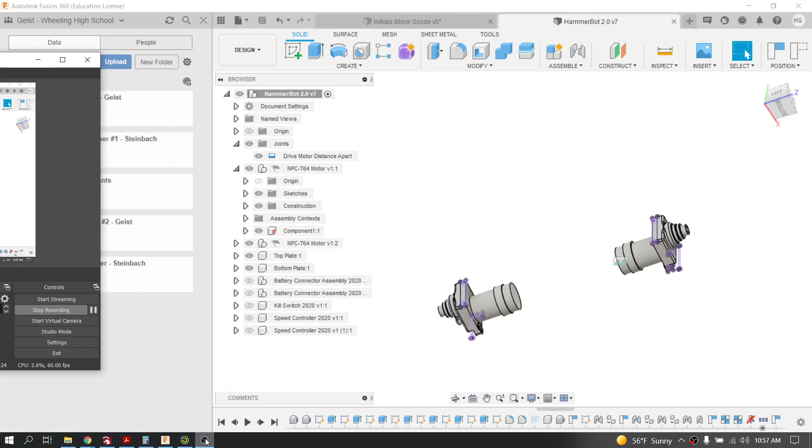So I'm going to use the HammerBot template to get started. So if you open your folder, you should find a template in which there are probably two motors sitting in there, spread apart and constrained or jointed together. So I'm going to start with that. Now, if you left click and try to drag them, they will not move. I kind of randomly placed them apart.

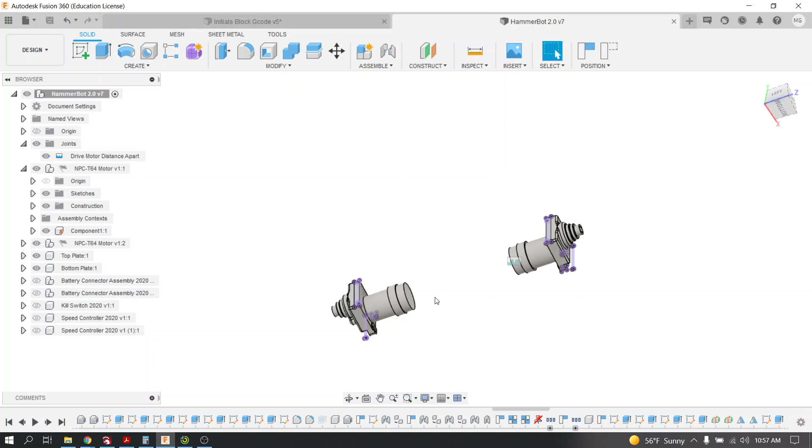You're going to have to make some changes to that based on how much stuff you're going to put in between them. So if you want to just temporarily turn on the eyeballs next to all of the things that are going to have to eventually fit into the robot. It's really not much if you don't have a weapon. You've got two speed controllers, two batteries, and a switch, a kill switch, and this turns it on and off.

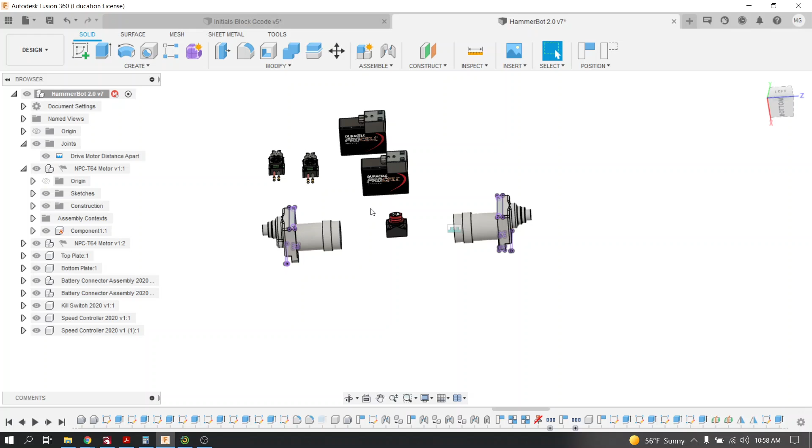There's other things, wires, a lot of wires actually, and a little tiny receiver, but I didn't put that in yet. And you're also going to want to make sure that your hands can fit in here to move things around, to plug in the little connectors that fit into here and things, and we'll get to that later. But remember that this stuff is going to have to fit in. So we're going to turn them off by clicking the eyeball for now.

So I want to show you how to do some designing where we don't have to use as many dimensions as you normally would in an IED class when you're starting from scratch. So I want to show you where the joints are. So if you're opening it for the first time, it might look like this, where the whole tree system in the browser is closed or collapsed. But if you expand the joints, I named this joint Drive Motor Distance Apart.

And if you right click and you edit that joint, you're going to notice that there's an offset distance in the Z of 15 inches. I can change that to whatever I want, 20 inches or 5 inches, or basically that's going to say how far apart those motors are, and I can make that change at any point in the design if there's not enough or too much room.

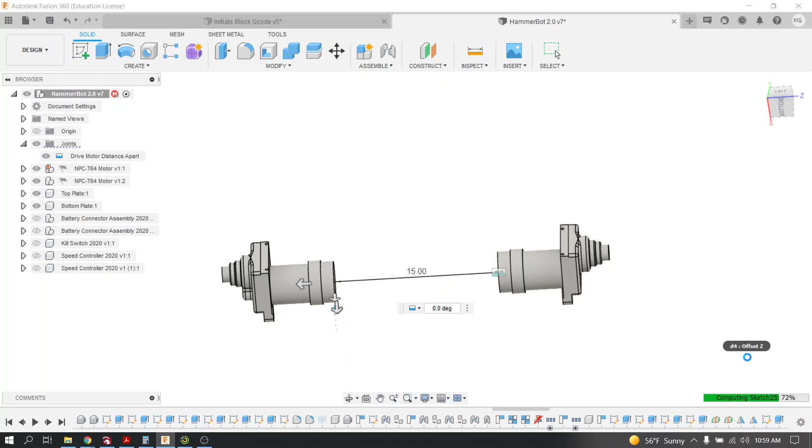I'm going to start with 15 inches and kind of begin my design and see what that leaves me when I start to put my batteries and all my components inside my design. So once that updates my graphics, I am going to begin. So I have two components already created for you, a top plate and a bottom plate. And there's only one thing in each of these. So I'm going to go ahead and activate my top plate. Notice how these ghost away.

And when I do that, I want you to notice if you expand the tree below it, there's a sketch down here in the history that I've already started. I would recommend that you begin on this sketch, and I'm going to tell you why. If I double click down here in my history, if you open up the sketches folder, you'll also see that that sketch exists.

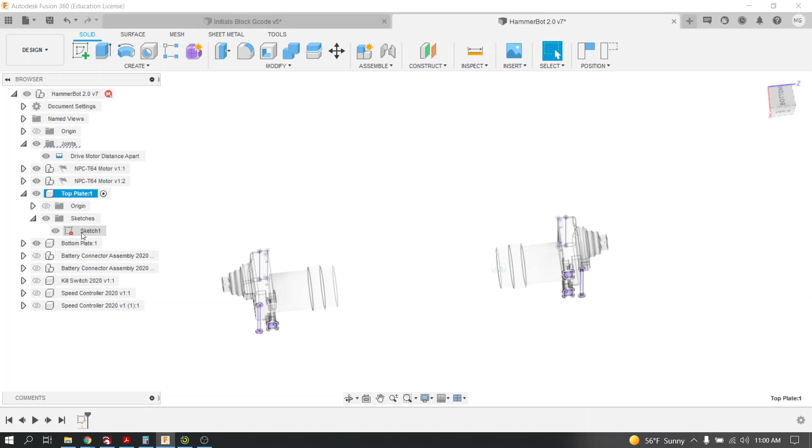So if I start on that sketch, what I've done is I've projected the geometry of the motor onto the sketch, which is like creating a shadow of the hole in which we're going to be bolting the top plate to the motor. And I've also projected the edge of the motor, the shadow of the edge of the motor, onto the sketch.

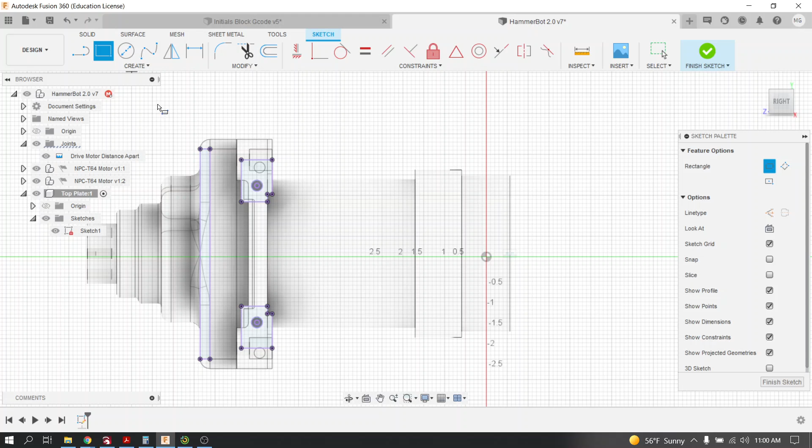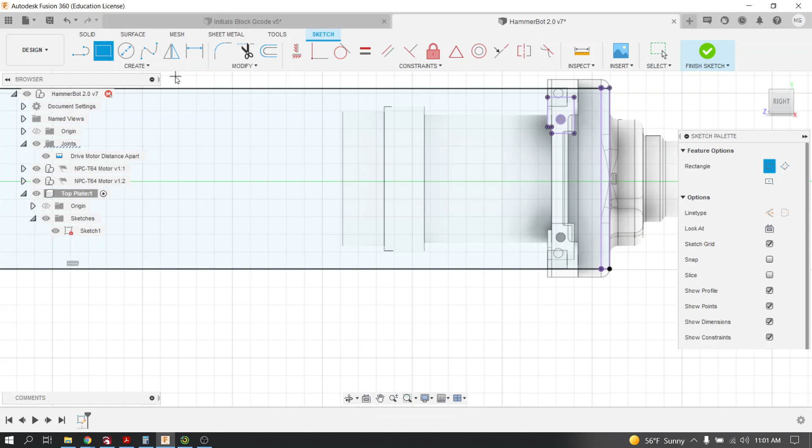So what I'm going to do is I'm going to draw a rectangle, and I'm going to snap, making sure that the little box symbol comes up when I click. And then I'm going to roll my mouse out and pan over to the right hand corner, and I'm going to snap to the furthest edge here because in my mind I'd like to design this plate to go the full distance all the way until the edge of the motor, and then I want to make sure that these holes come up as well. So right there.

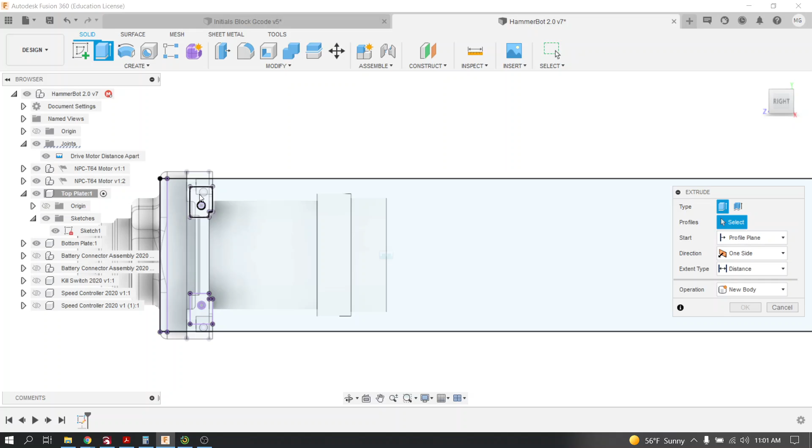Okay, so the reason why I'm doing this is because when I finish this sketch, giving my computer a second to catch up, and I extrude, always capture position anytime that window comes up, I can extrude this sketch and I can include the holes that I projected from the motors. Now notice how all of my lines are black, meaning that they're fully constrained.

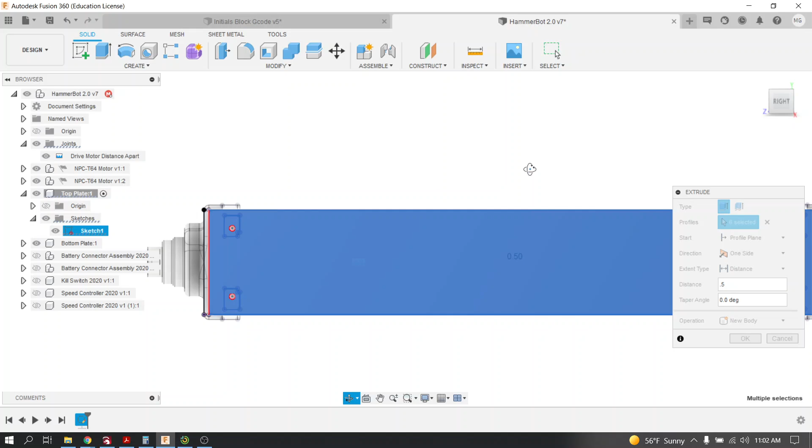Pick all these regions and extrude this to a distance of 0.5. That's because I'm going to make this out of polycarbonate, and if you measure how thick the polycarbonate material is in the shop, it's 0.500. Now I'm going to hit OK.

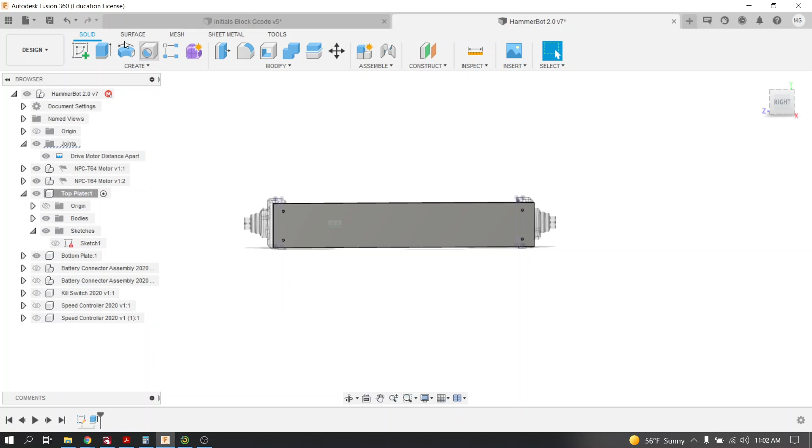Assuming for this hammer bot that I only want this plate to be this wide, I think that's okay. If I wanted this to be like a wedge bot, I could have made this rectangle longer, or created a sketch on this bottom and added an additional rectangle snapped onto this corner, so the top plate could be a little bit longer by adding an additional extrusion.

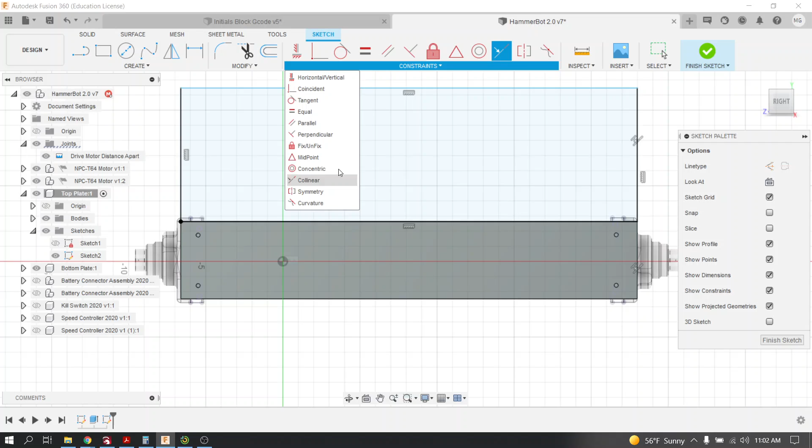Now I'm going to use collinear to line it up with this edge, just like that. The reason why I'm using constraints instead of dimensions is because I haven't dimensioned this yet - I don't know how far forward I want the robot. I'm going to activate my assembly now and show you why I did the snapping to the projected geometry and the collinear between these two edges.

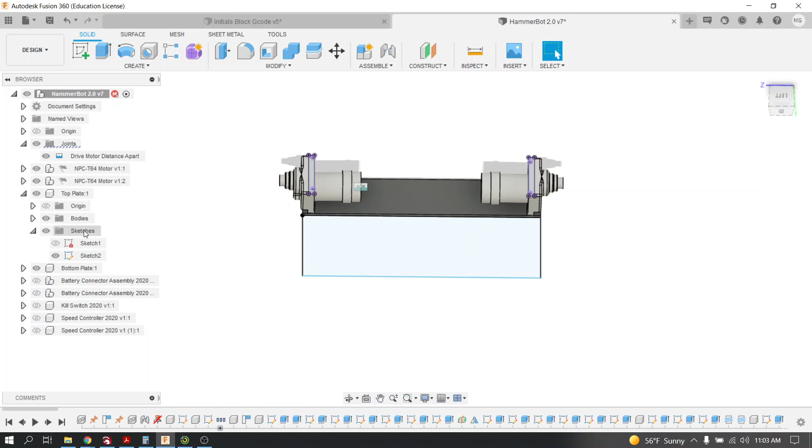Let's say that I decide I forgot to extrude this. Let me go back to my top plate and extrude that to half an inch, 0.5. Looks like I've got to go in the negative direction - make sure you're extruding it all in the same direction. There we go, okay, so now I have a bottom plate.

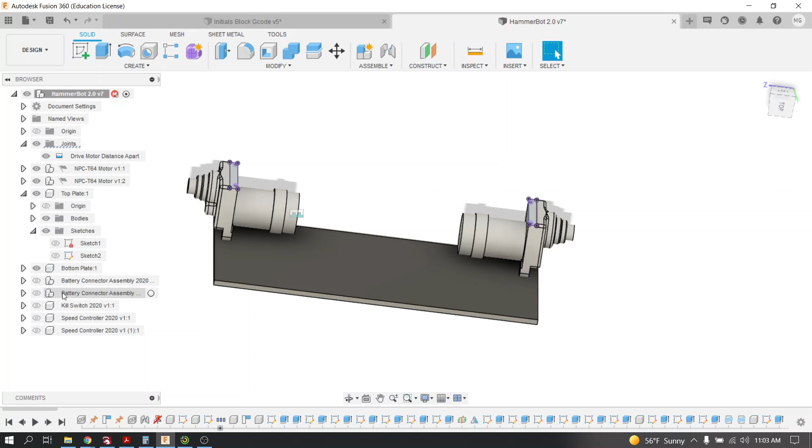I'm going to activate my assembly again. So let's say I turn on my batteries and I place them in there, and right now they're not constrained or anything. Let's say that I decide I want my motors to be closer together.

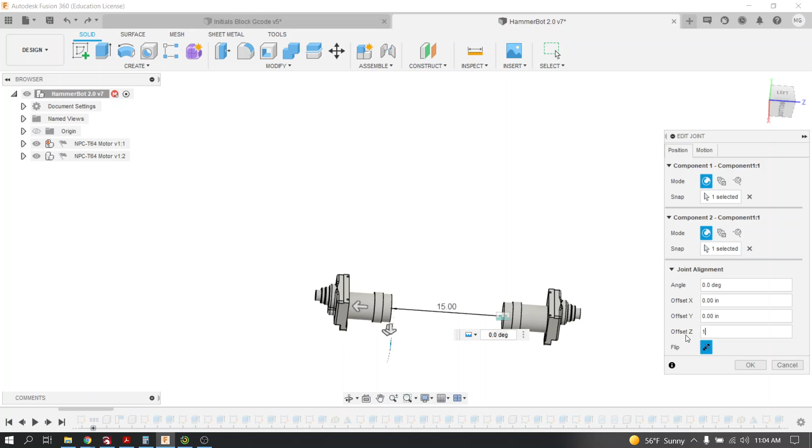If I go and edit this joint by right-click, edit, and change my offset distance to, let's say, 10, and I hit OK, watch what happens. Computing. Updating graphics, sorry my computer's slow. Everything moved with it - so this plate shrunk with the motors as the distance came together.

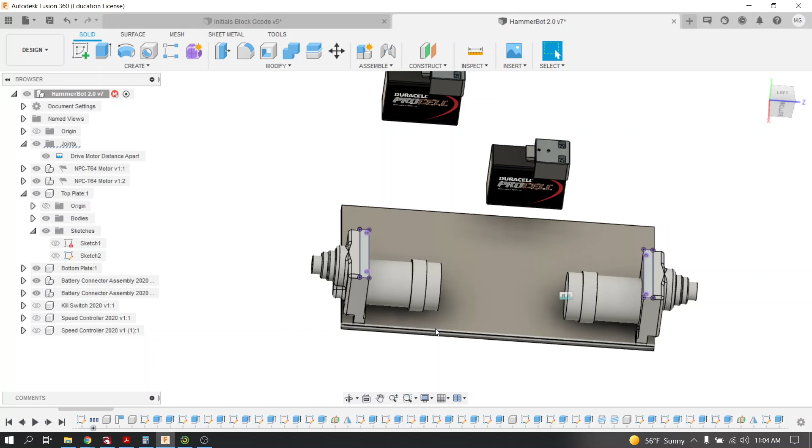So the projected geometry, which were just the shadows cast onto the sketch, it followed. That's really important, because if we make any changes to our design, meaning we move the motors closer or further apart, it's going to follow that geometry.

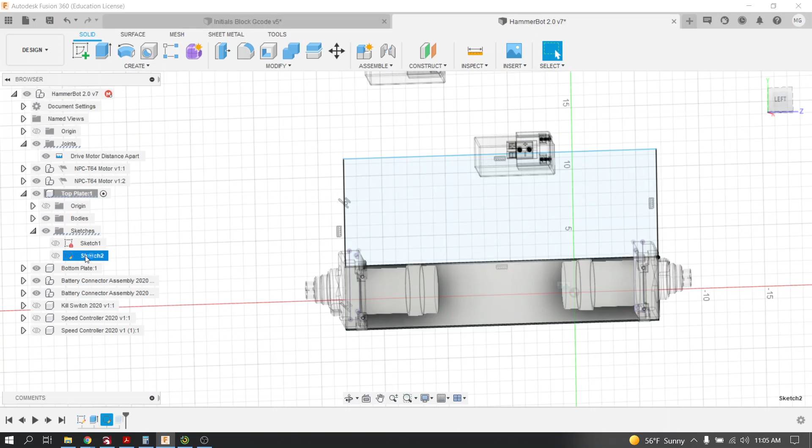Now I did not put any dimensions on how far forward this plate came, so that one is going to require dimensions. I'm going to go back to my top plate, open up sketch number 2, and you'll notice this line is still blue. So I better figure out how much further forward I want that robot to come - maybe for now I'll put in 10 inches, and I can always edit that later. But there's only one dimension in this bottom or top plate, you'll notice - everything else is driven by the projected geometry.

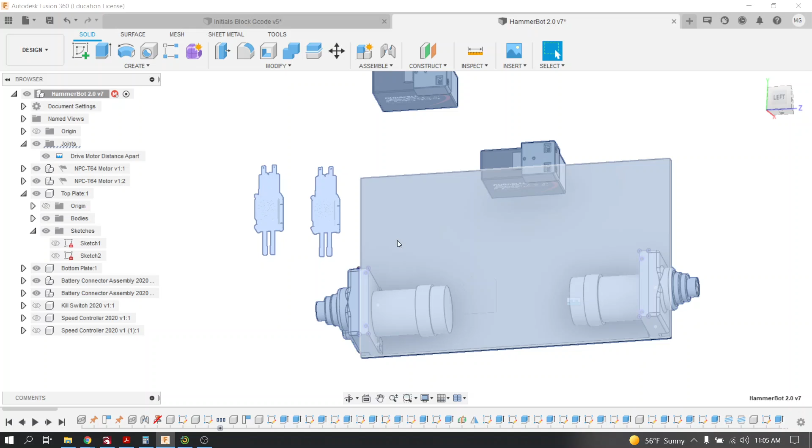Now, you'll notice when I go back to my assembly, if I activate it by clicking the radio button, and if I left click and hold, I move this plate - oops, don't do that, I'm going to undo.

That's because every time you create a component and go back to the assembly, we need to create a joint, meaning tell it: are you locked to something? Should you be rotating? Should you be sliding? So after you create a component or a body, it's very important that you immediately create a joint.

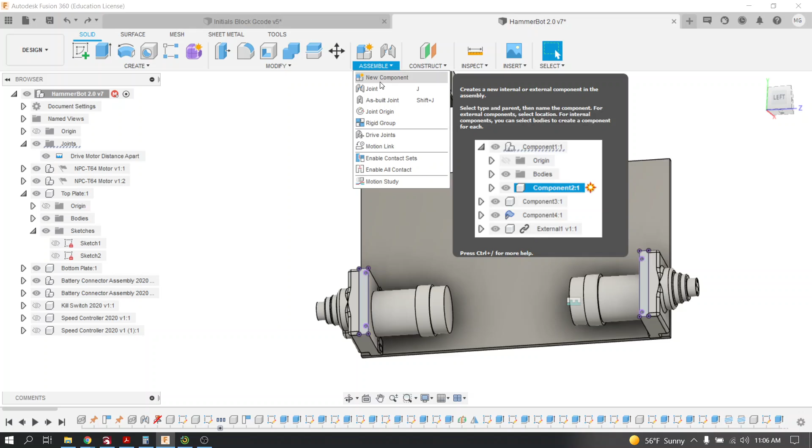So what we're going to do is right away go to Assemble, and we're going to do an as-built joint - meaning directly as I build it, I want to create a joint so that it stays in place and I can't move it. As built, I would like to do a rigid joint, because this plate isn't supposed to move in relationship to the motors, so rigid is perfectly fine.

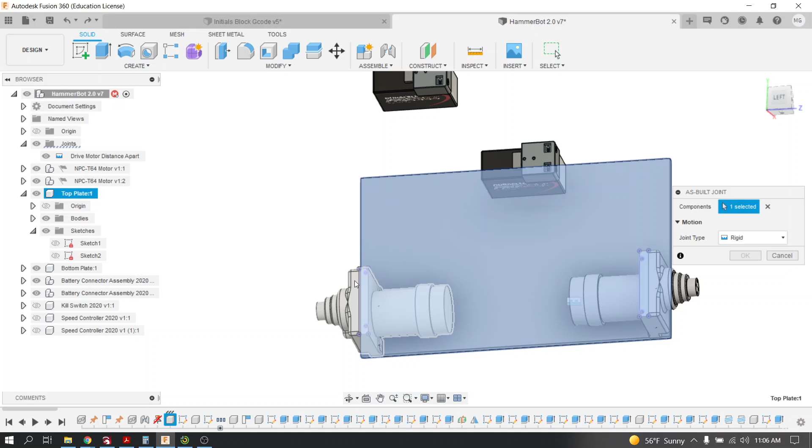I'm going to select the plate, and then pick a second component that I would like to keep it locked together with. So I'm going to pick the motor, and just say OK. It's a good idea - you'll notice in the joints folder that a new rigid joint appears.

Good idea, folks, that you name these. So a slow 2 clicks, name them: Top plate locked to motor - that's just for future reference. You're going to end up having a lot of these joints, and you don't want to get confused as to which one is which, just in case you have to modify it later.

All right, let's just make sure that once I've done that, if I change my motor distance, that plate's going to move with it. Let's go crazy - let's say 25 inches.

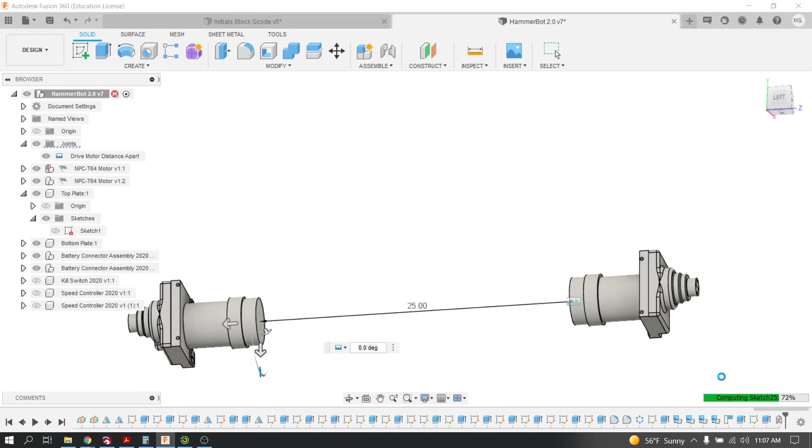It's going to have to compute my graphics because my computer is getting old, kind of like the designer here. We're going to update the graphics, and voila, I've got a huge robot.

I don't want it to be that big, so I'm going to click undo. You guys should know this undo button, it's right here, the arrow to the left.

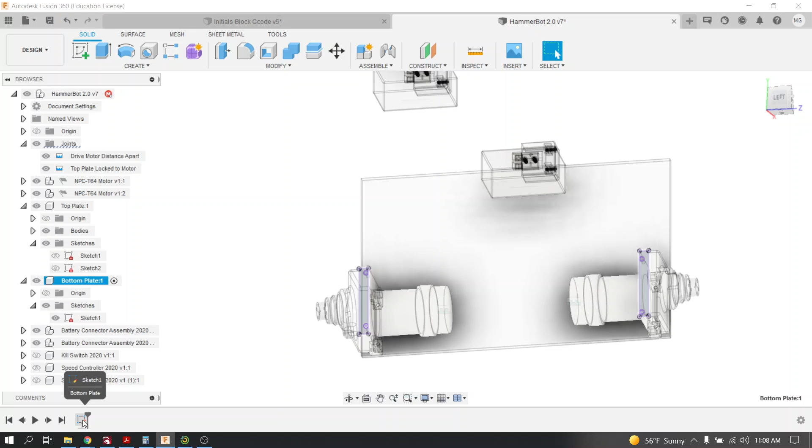Anytime you make a mistake, undo. Now I'm going to work on my bottom plate, and I'm going to basically do the same thing. Activate it, I already have a sketch started for you. Please use my sketch. If I open up the sketches folder, I can find it there, or I can just double click on the history and open it from there.

And I'm going to draw a rectangle and start in the top corner, the topmost corner, scroll out, in to the bottommost corner, right? Okay, and then I'm going to finish my sketch, let my computer catch up.

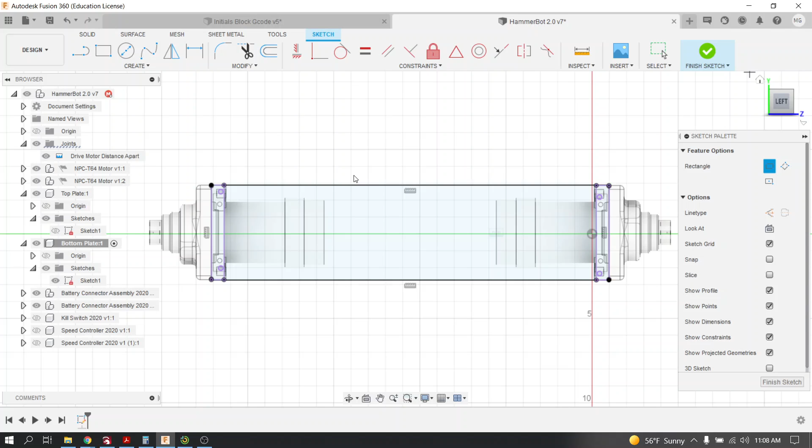And then I'm going to extrude it, making sure that the holes don't extrude, so that should be empty. If it accidentally you pick it, just cancel and try it again.

So 0.5. Should probably tilt my world a little bit, make sure I'm going in the right direction. Yep, I'm going up.

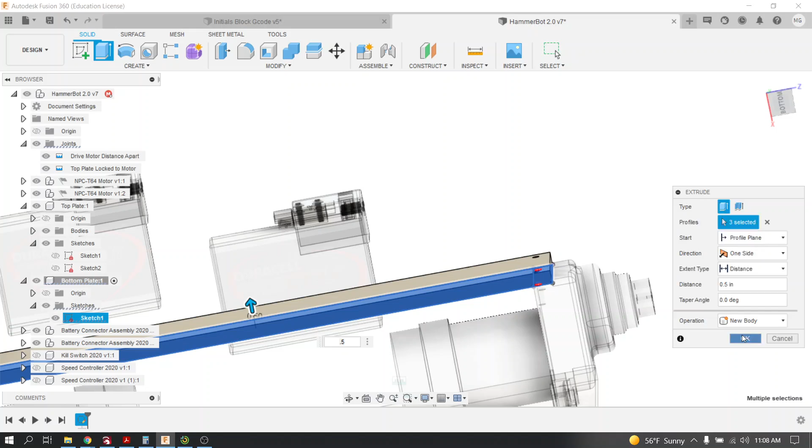You might, if you're smart and thinking that I should probably project these holes a little bit larger than the diameter of the hole that's behind it, you're absolutely correct for clearance, but we do have drills and we can always drill those out a little bit more once it comes off the machine.

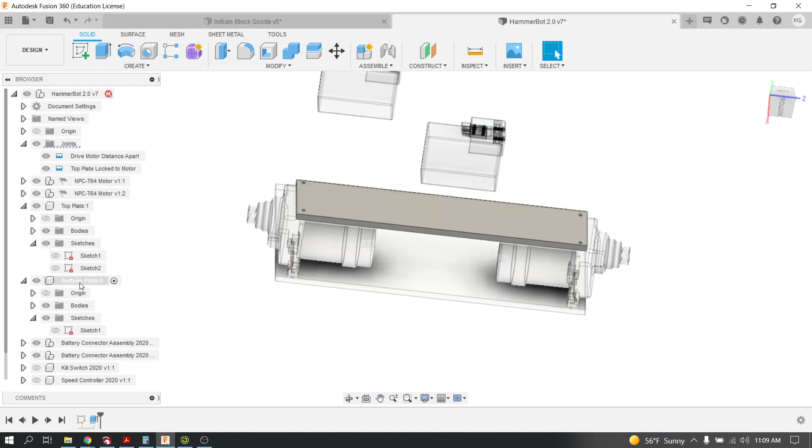That's fine, so I'm going to practice what I preach, and I'm going to go directly to the assembly, and I'm going to do an as-built joint so it doesn't move, because look, it moved. Undo. So I better immediately do an as-built joint.

This to the motor. Now it's locked, now it does not move. And I'm going to name it with a slow double click.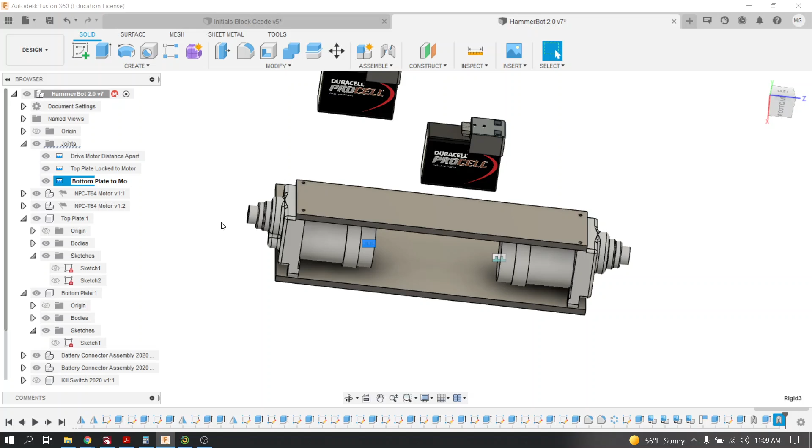Bottom. I can't spell. Bottom plate to motor. Here we go. Now these are solid pieces of polycarbonate, which will weigh the most.

So we're certainly going to want to maybe remove some material or lighten them up. At this point, I think it's time for us to look at the geometry of each of these components and think about what can we do to make them lighter. Can we take out some triangles or squares or rectangles to lighten them up?

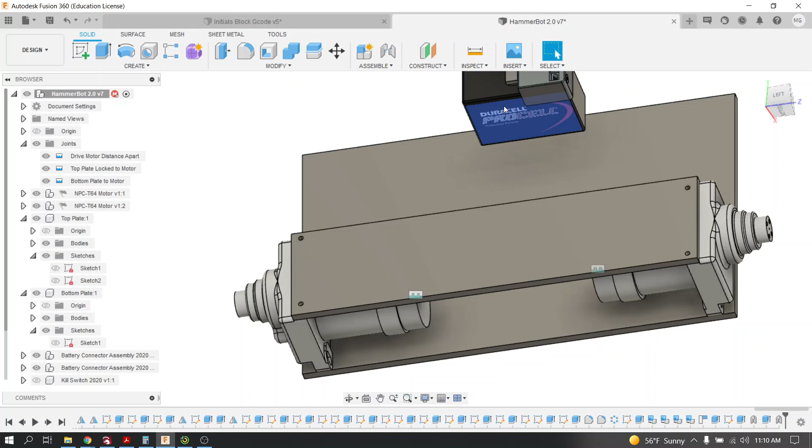If we're going to maybe put this battery—why won't you move, battery? Sometimes it's a little clicky. Left click, hold to drag parts around.

You might want to start thinking about placing these batteries into your assembly now and moving them around to make sure you have room. Where are they going to go? How are they going to sit? Are you going to have room to get your hands in there? Of course, maybe this plate comes forward a little bit more than what I have.

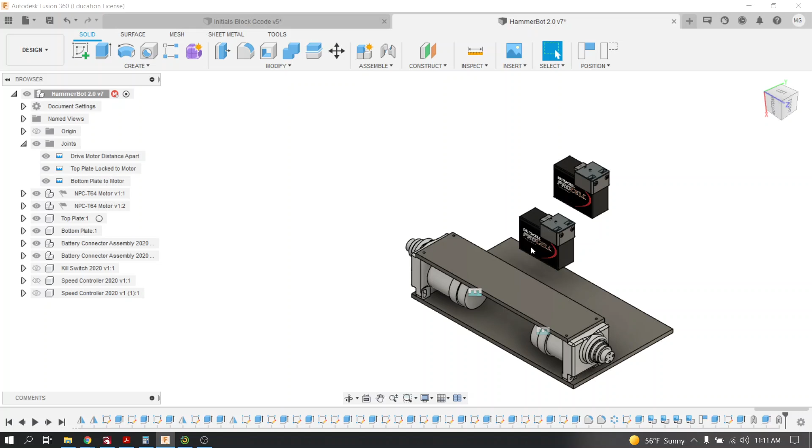If things are in your way and you can't see, you can temporarily turn things on and off by clicking this little eyeball. But if you'd like to place your batteries into the robot using a joint, I'm going to show you how to do that right now.

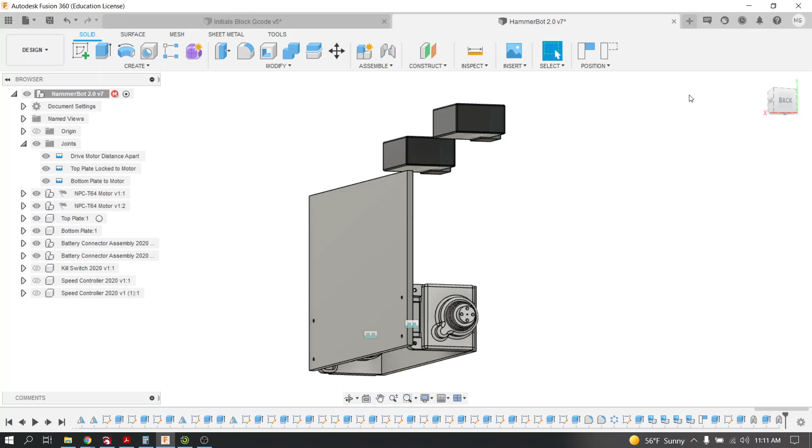If you're wondering how I'm easily orbiting, press the Shift key and hold your middle mouse rolling button at the same time, and you can easily orbit. So I'm going to spin it kind of upside down-ish, and I'm going to add these batteries locked to the robot.

So let's assume that I wanted these batteries to sit somewhere on the surface of this plate here. This is actually the top plate. I don't know why I'm building it upside down, but I guess top, bottom, it really doesn't matter. Maybe it does matter, but for this demonstration it doesn't.

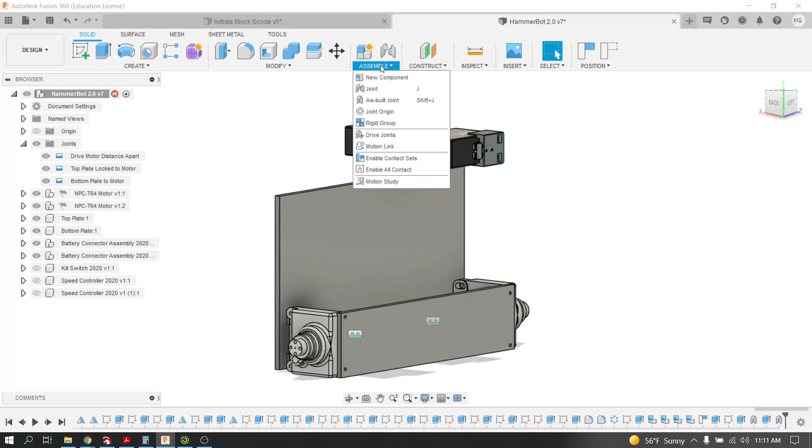So what I'm going to do is go to Assemble. And in this case, since I didn't build the batteries in place, I kind of brought them in, I'm going to do a regular joint. And in this case, I'm going to go to Motion and make sure that I'm on Rigid.

These are all different types of motion. Unless something is moving, you're always going to use Rigid. When things are in motion, that's when we get into these other ones here. But for the most part, if it's not moving, you're going to use Rigid.

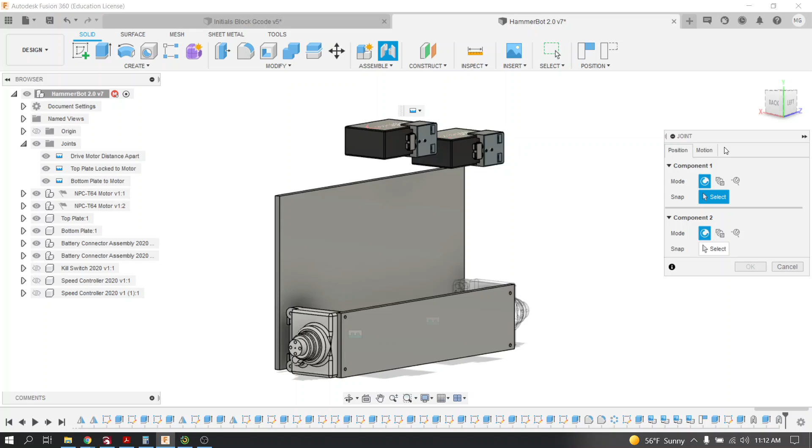After you select Rigid, go back to Position, and this is how you pick things to move them around, to get them to where you want them to go. So again, make sure it's on Rigid, and then for Position, you're going to spin around and pick two different objects from two different positions.

So I'm going to first pick the battery, and also as I'm picking it, before I click, I'm going to make sure that the pick point is, for this one, in the center.

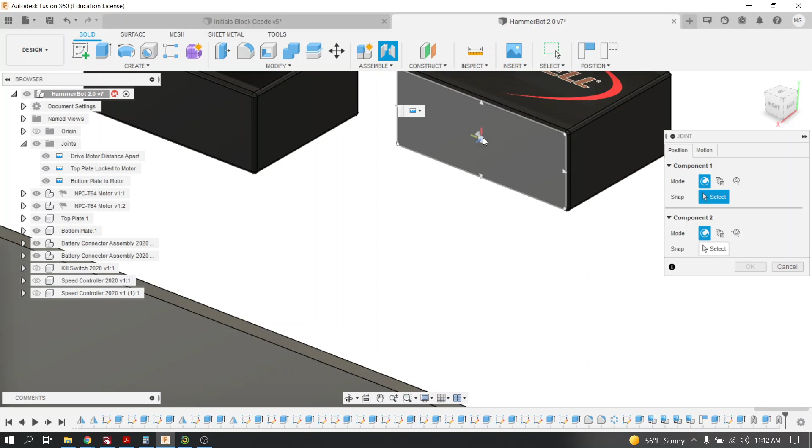So this surface, and then make sure the center point lights up before I click. By doing that, when I spin around and find the surface I'm going to be sticking it onto, you'll notice that surface lights up and the center point lines up. That means the battery is going to go to this surface, and those two points that lit up are going to touch.

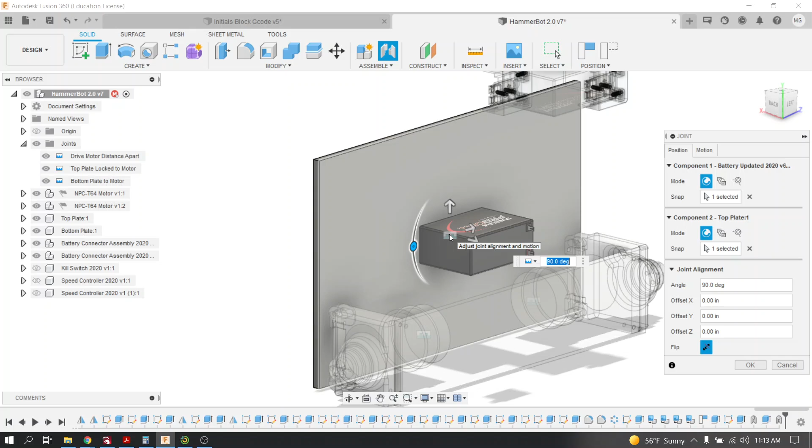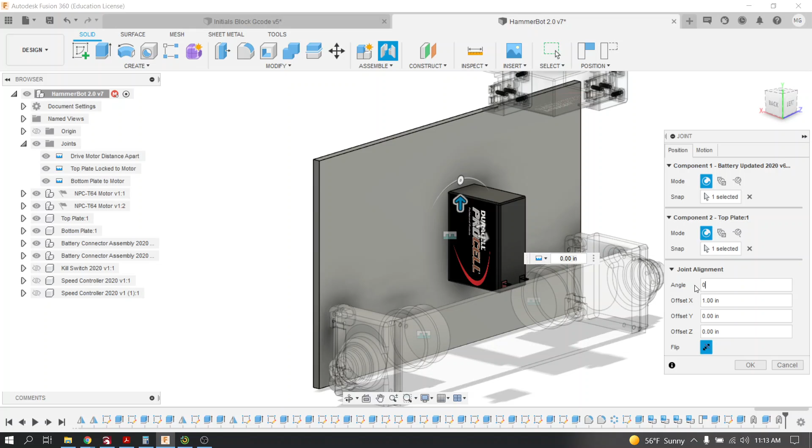Now, I don't want the battery to go there. From here, I can move it to position it by dragging the arrows, or if you wanted, type in distances. If I don't like the orientation, the angle, I could say I want it at 0 degrees if I want the battery going that way, or 90 degrees if I want it going that way. I don't know yet, so I'm just going to start maybe going that way. Again, I'm not sure what I want yet, I just kind of want to place them on the surface to start.

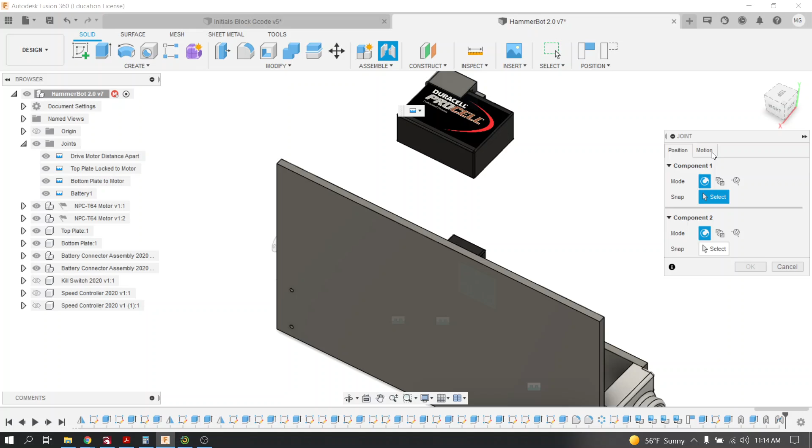I better name that battery 1 or something so I know what these joints are, so when I move them later I have an idea of what I'm moving. Do the next one: joint, rigid, center to center. I think I did 90 degrees, so I should do this one at 0. And I'm going to just move it over so it's not on top of this other one. This is going to be battery 2.

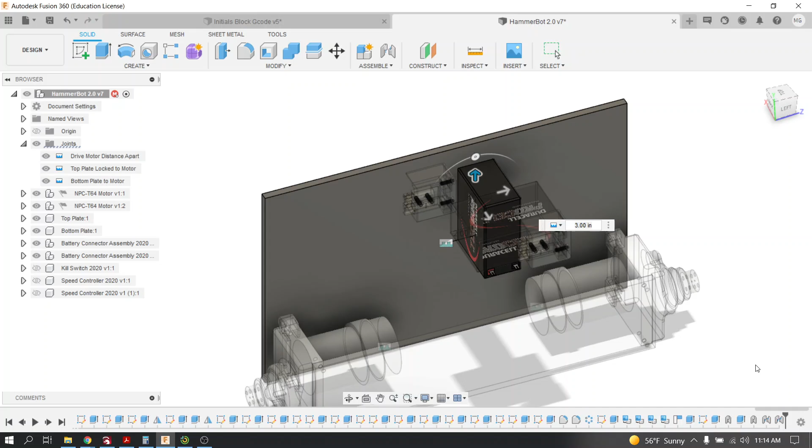So as we move through this design, let's say I don't like where they're at. All I got to do is right click, edit joint, and then I can just move it over. Or if I like it more forward, I can move it from there. Now I've just moved it by editing the joint.

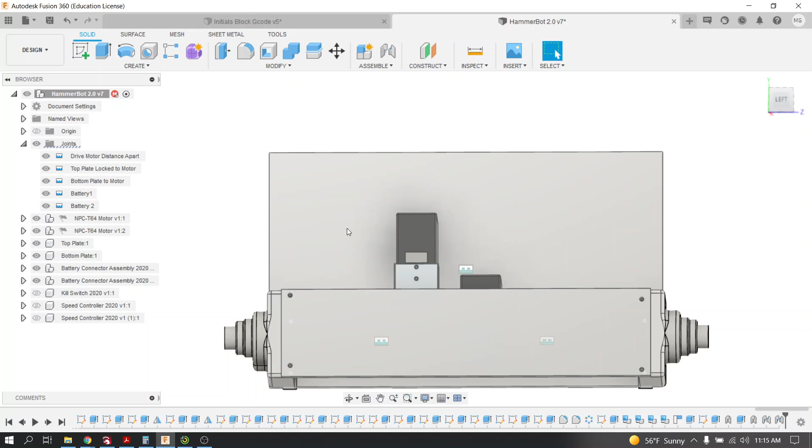But again, I think where I placed them might be a good starting point. Maybe we can tuck them a little bit forward, possibly. All right, so we'll move them back, and I'll take the other one and move it back as well. Edit joint, slide it back so it's flush, and hit OK. And there we go. Now we've got 2 batteries, not very symmetrical, but for a demo video, hey, give me 5 stars.

All right, you can do the same thing with the kill switch. Just turn on the little light bulb. You can do that for the speed controller, and there are 2 speed controllers.

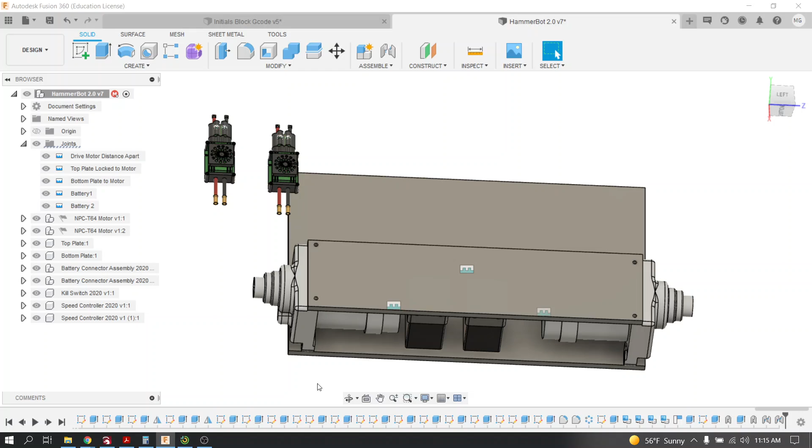Now, you can see I put this flush, meaning I mated it so it's sitting right on top of this piece of plastic or polycarb. You might want to make a little pocket for it to sit into. Again, this is a solid piece of material. Probably wouldn't recommend using a complete solid piece. If you look at some of the old robots we made in previous years, we cut out all kinds of different pockets and made holes, and that's to reduce the material.

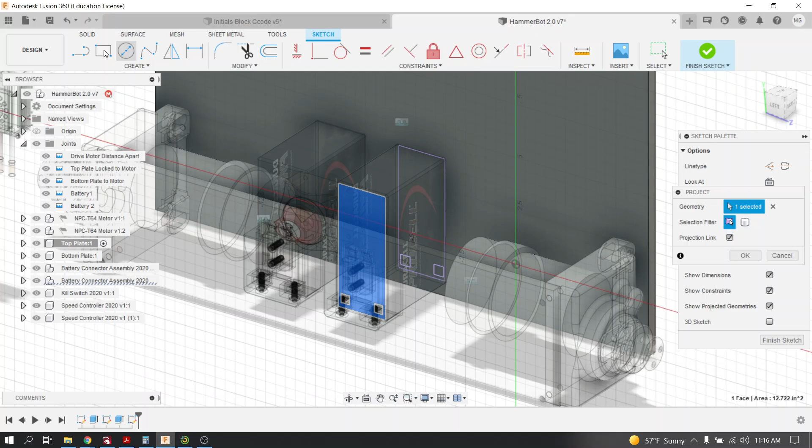So you might want to consider doing that. If that's the case, maybe open up that part by activating it, make a sketch on that surface, and maybe look at projecting geometry. Remember, go to Create. Once you know your batteries are going to go there, you can always project the shape of the battery onto the surface. You can see that shape is now projected. Give yourself a little extra room, maybe draw a rectangle that's clearly bigger than the battery itself.

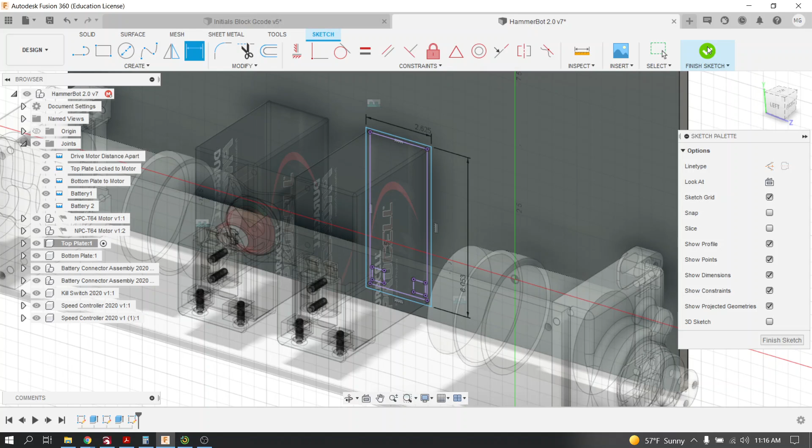Measure the battery, get a ruler, go out in the shop, measure it, make sure it's going to fit. Put dimensions in. Again, this is just a demonstration, I'm not getting crazy with all the dimensions and everything, but just making a simple pocket, something for it to sit into. My material thickness is 1/2 inch, so I certainly wouldn't want to go all the way through, but you can see now I've got a nice little pocket the battery can slip down into and sit nice and neat.

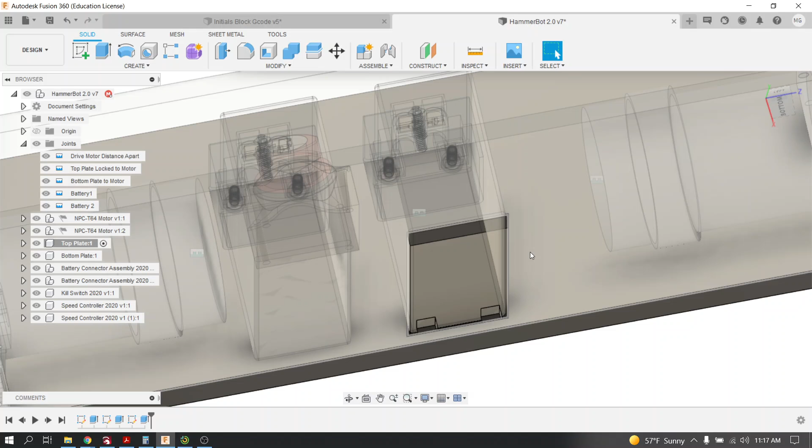So there we go. If you can't see that, or if you're having trouble seeing things, remember, just turn off your... Ooh, looks like I didn't pick all of my regions when I extruded. You see that? You got to be careful when you're projecting geometry that you're picking all of the surface, or all of the profiles when you're extruding. So, simple mistake.